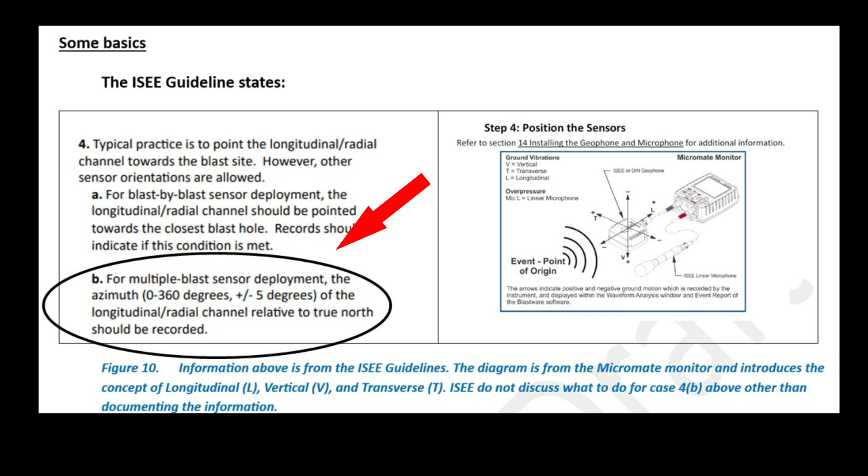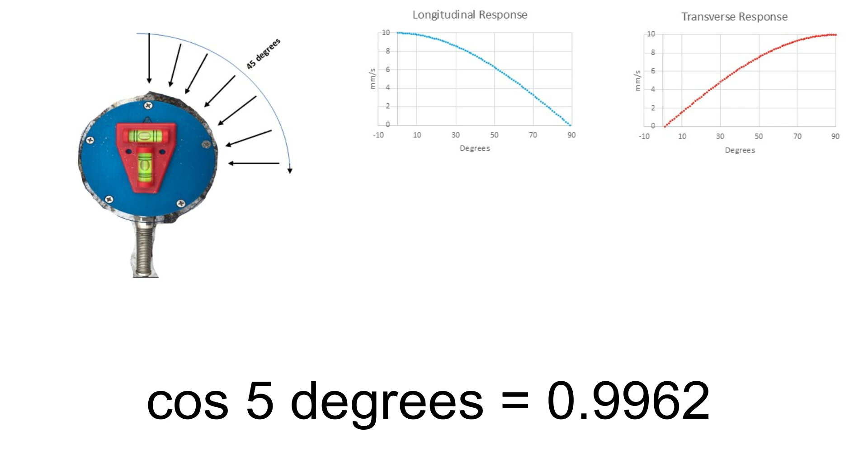So to simulate a sensor not aimed at the energy source, imagine recording individual 10 millimeter per second taps clockwise around the sensor. Now first, no matter where you tap on top of the sensor with a 10 millimeter per second tap, every reading should be 10 millimeters per second. And for geophysical operations, the standard for a recording geophone is plus or minus 10 degrees, which keeps the data within 98%. The ISEE was calling for a 5-degree accuracy, which is 99.6%. But this is just to look at the horizontal components.

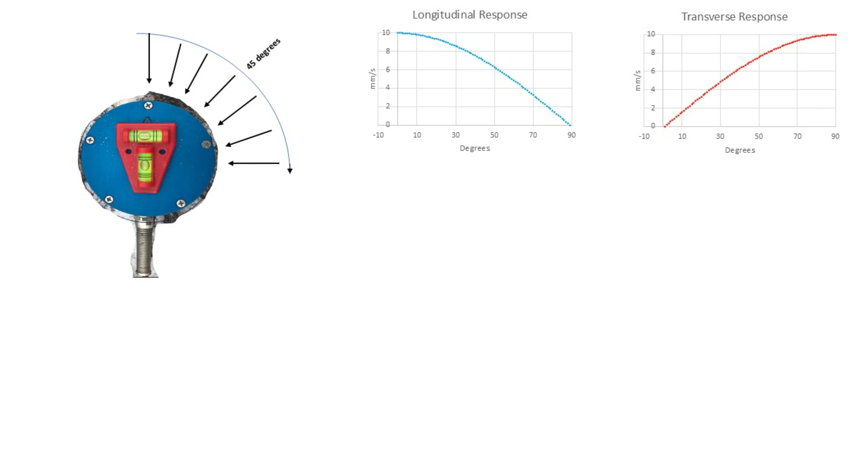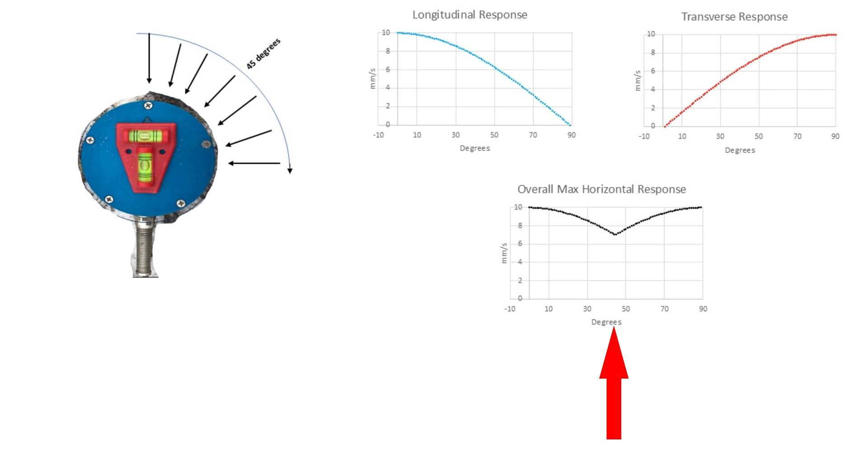So with a perfect tap, the vibration is recorded as component vectors. The blue represents the PPV reading at the longitudinal sensor from 0 to 90 degrees. The red is a transverse sensor PPV recording from 0 to 90 degrees. If we were to look at the max of either sensor, it would look like this third display. That means at 45 degrees offset, each maximum recorded PPV is just 71% of the actual vibration energy. If your sensor is not aimed at the source, this is what you might be relying on during real-time monitoring.

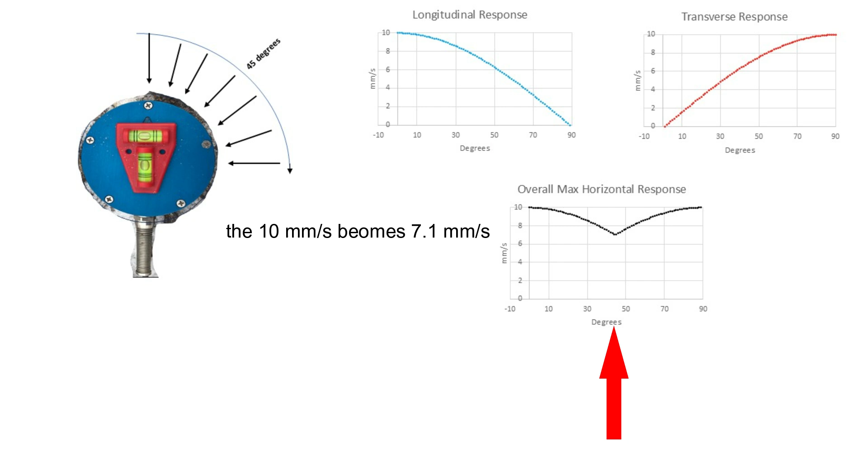So, how do we recover the 10 millimeters per second? You have to use the Euclidean norm from both horizontal sensors, which is the square root of the sum of the squares of the horizontal measurements. This would yield the results shown in green.

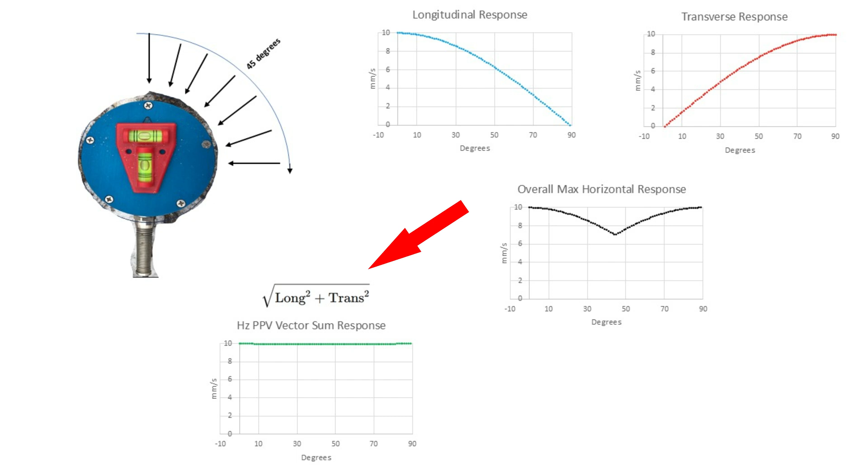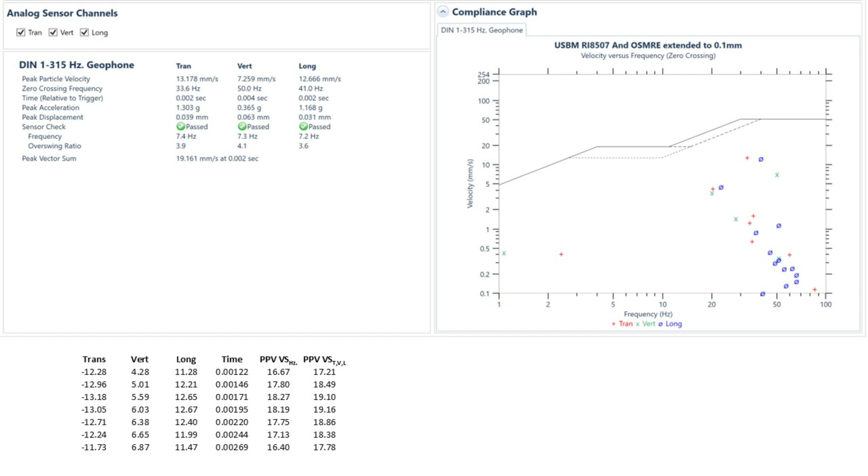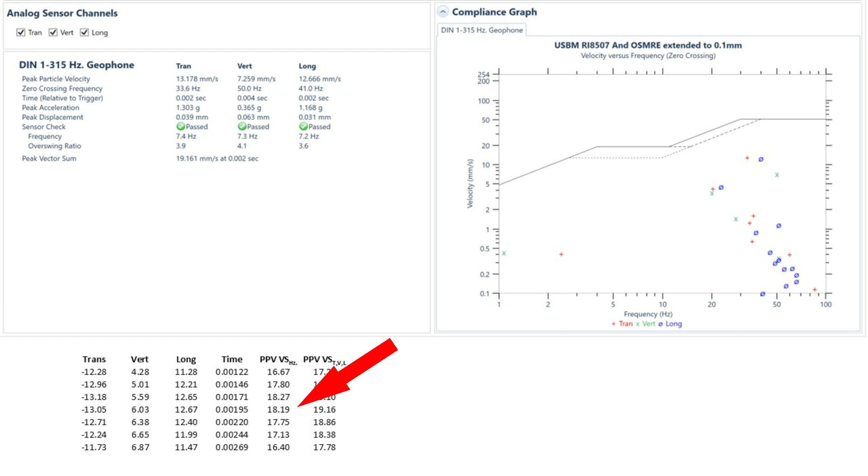Now, this is not a perfect solution and will likely yield slightly higher vibration values, but it is better than misunderstanding the data. The reason the results could be slightly higher is, even with the longitudinal axis pointed at the energy source, there would be vibrations measured on the transverse axis. The key takeaway is, horizontal PPV readings depend on your sensor orientation, and although not discussed, the vertical PPV is independent of the azimuth.

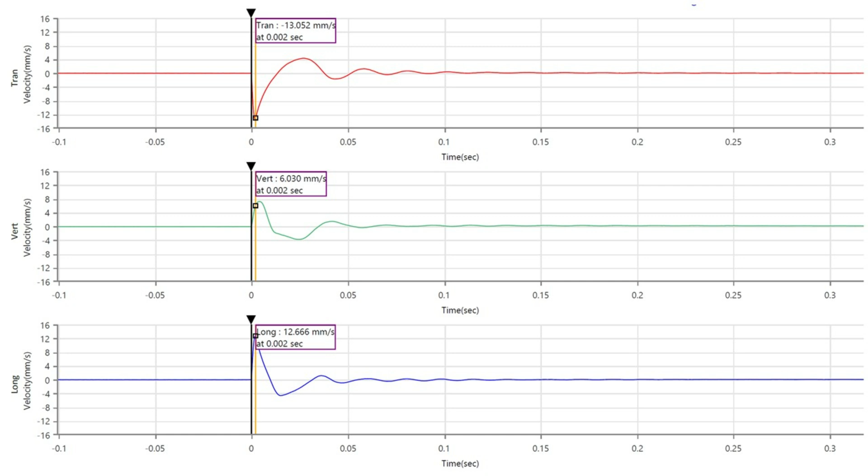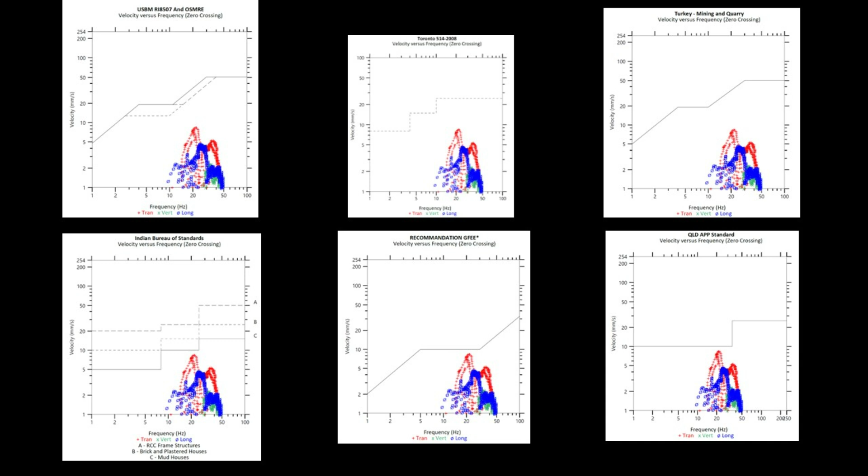So, compliance considerations. This is the same data displayed with different compliance thresholds. The industry standard is red for transverse, green for vertical, and blue for longitudinal, and I've tried to stick with that convention for the most part. The basics here are each component, the transverse, vertical, longitudinal, must stay below the threshold. The PPV vector sum is not required for compliance, but these data are reliant on the sensor being aimed at the energy source.

So why do horizontal vibrations matter? Well, horizontal vibrations are more likely to cause structural damage than similar vertical vibrations. And this is taken from a vibration monitoring expert, and Ken's statements confirm in the first paragraph, horizontal motions are key to damage prevention. Second paragraph, vertical motions affect different structures differently. And in the last paragraph, Ken confirms a best practice would be to use the Euclidean norm, or the square root of the sum of the squares of the horizontal components. Given horizontal motions are more likely to cause damage, and if your sensor is not oriented for accurate readings, you need to understand this and mitigate for it.

And the reality is, often during testing, the sensors are usually aligned and aimed at the energy source at all offset distances. But in production, especially vibroseis, the sensors are often not aligned, which results in lower PPV measurements. The key takeaway, real-time production monitoring must account for sensor orientation, as does any post-processing evaluation.

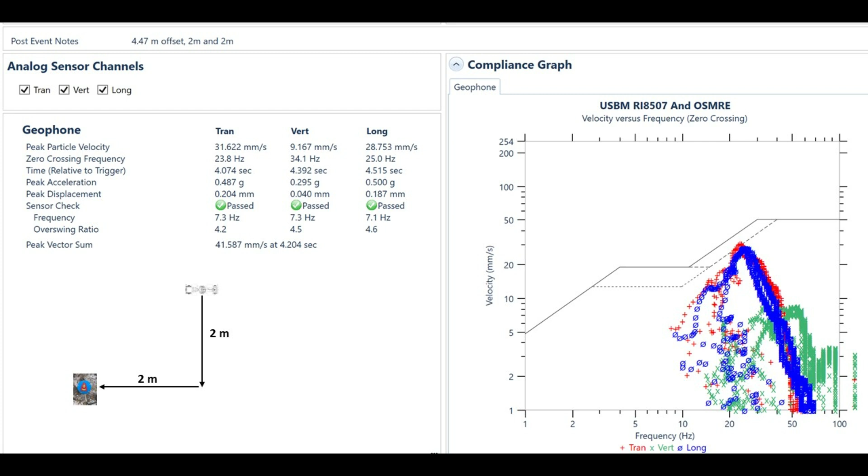You can see it. The transverse in red just exceeds the USBM plaster limit, and the longitudinal in blue is barely within the USBM compliance. And we expect them to be quite similar at the 45 degrees. The vertical in green is well below the compliance, but again, that's independent.

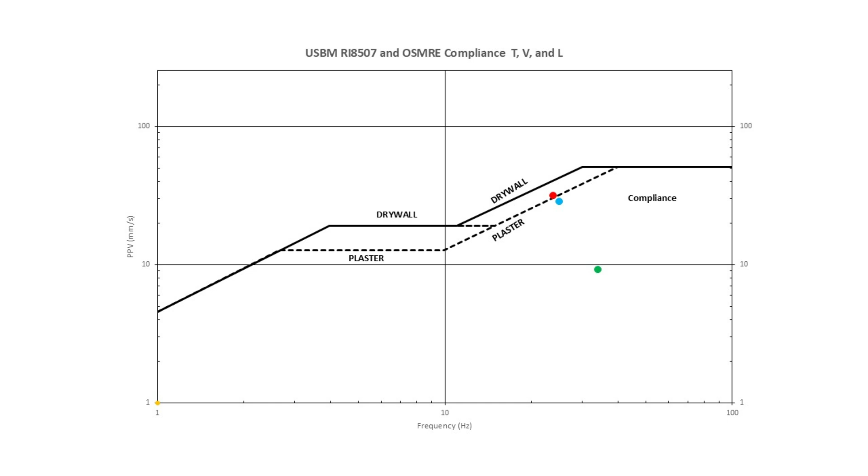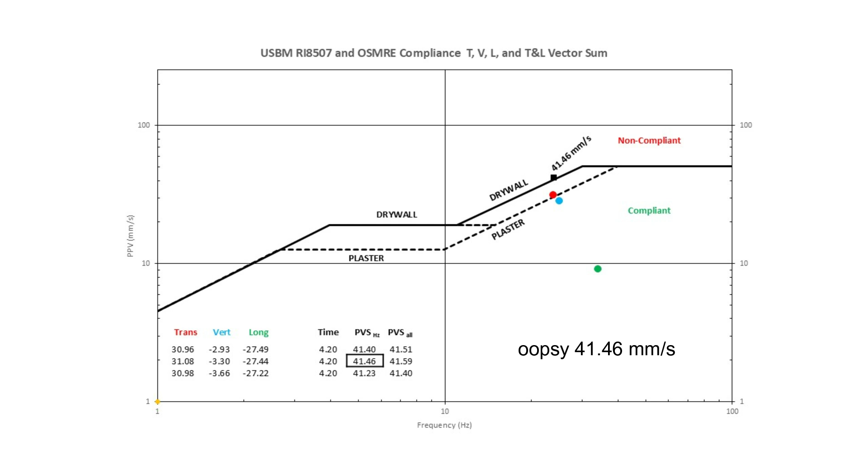So now this is looking at the 3 individual maximums of our example. But we know the sensors are at 45 degree offset and may only be showing 71% of the actual value. So using the Euclidean norm or norm, this is a peak particle velocity vector sum of the horizontal components is 41.46 millimeters per second, which plots as a small black square.

I did this by extracting the 15,000 recorded data points, calculated the Euclidean norm of the 2 horizontal components at every sample interval, and plotted the maximum. In real-time monitoring, the instrument only shows the max PPV of one component, doesn't tell you which one, the frequency, and the PPV vector sum. That means manual data extraction is required for full analysis.

The bottom left-hand corner shows the extract of the data at the maximum Euclidean norm of the horizontal measurements. The data from left to right are the transverse, vertical, longitudinal components, the time, the Euclidean norm of the horizontal components, and lastly, the Euclidean norm of all 3 components.

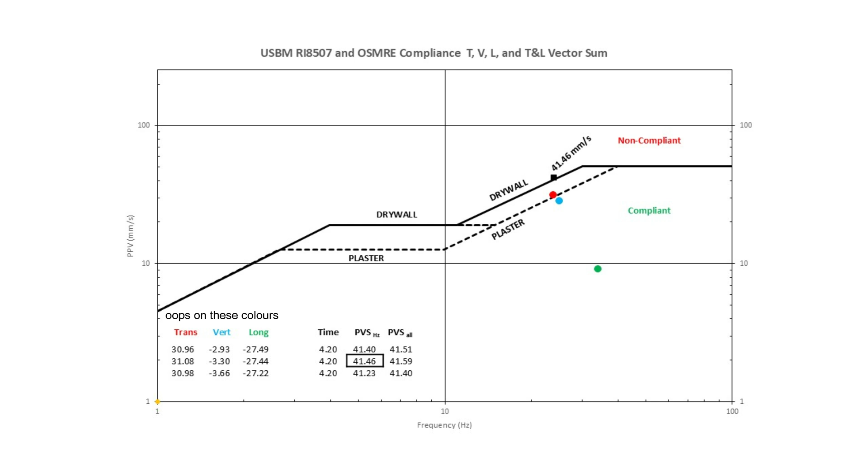If our sensor or a second instrument was aimed at the energy source, we probably would have recorded this 41.46 millimeter per second vibration, which was non-compliant for the drywall threshold and significantly higher than what we originally recorded.

When I first recognized this issue, I deferred to using the PPV vector sum of all 3 components, which is on the safer side. But it might be more accurate and more useful to be using the Euclidean norm of the horizontal components and the vertical component separately when working.

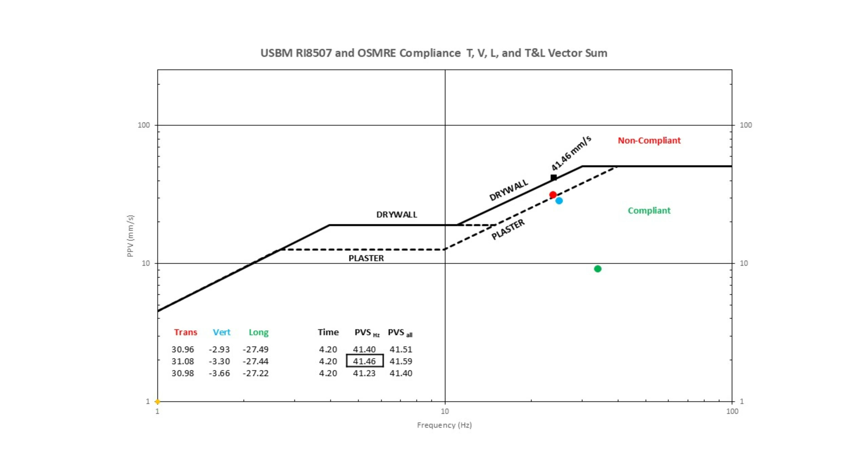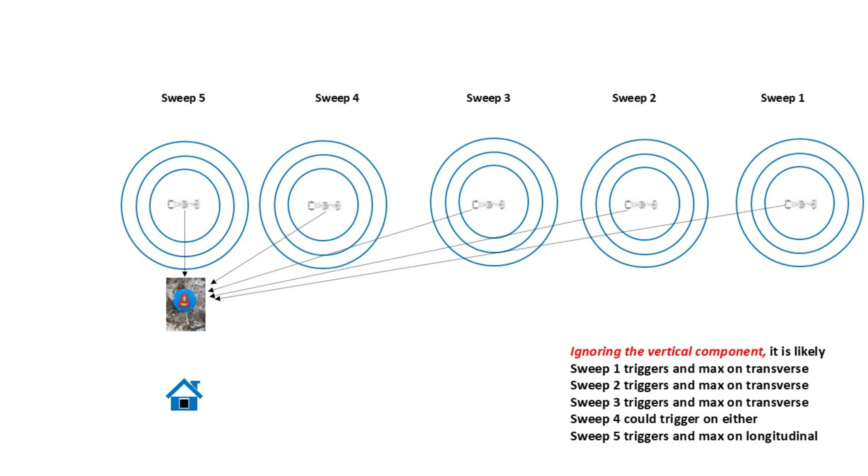Now, this slide ties to the Part 4 video about adequate testing and ensuring you analyze and understand the data to help you with real-time monitoring. In the Part 4 video, I mentioned I have seen many projects defer to 12 millimeters per second as a maximum. That way you virtually don't have to worry about the frequency.

If you defer to this method, you could safely just look at the max result, and if you were not pointed at the energy source, just use 9 millimeters per second as your max allowable, which is 71% of 12 millimeters per second. Now, this has negative implications for the subsurface data coverage, but it might be an easy out.

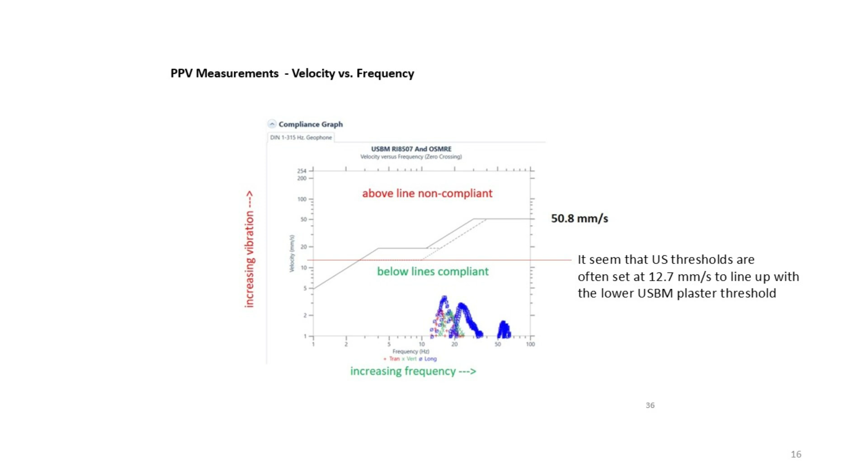So by this point, you should have plenty to think about. Or, on the other hand, you might just be nodding, wondering if there's anything I might say that you don't know. Okay, so slide 17.

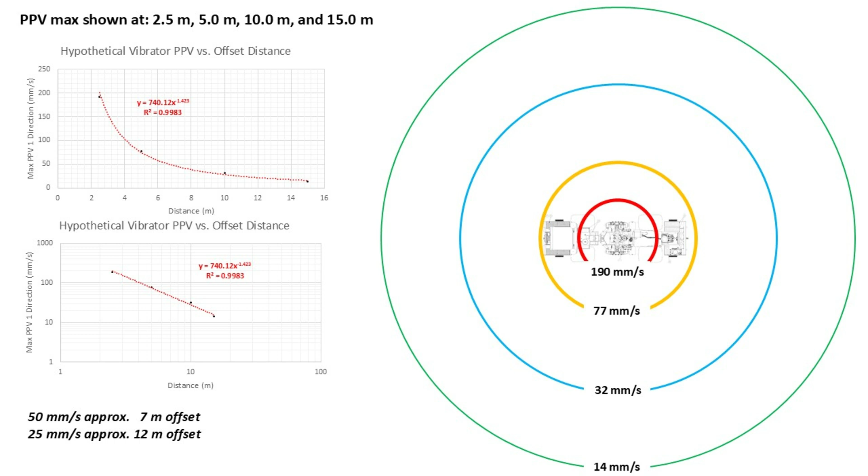Consider these test data from a larger vibrator. On the left, we have the energy decay curves shown with both linear and logarithmic graphs. And on the right side, I've created a PPV decay curve 360 degrees around the vibrator. These are peak particle velocity vector sum data and assume a homogeneous response around the vibrator. In rough surface terrain or other situations like a ditch, there will be variations.

Now, let's look at the individual components of a small vibrator as it approaches. This is from a smaller vibrator approaching the sensor. The sensor is at 2.8 meters cross-line from the vibrator as it approaches. The sensor orientation does not change. 3 of the graphs are all the individual sensor component responses, and the bottom right graph are all 3 components plotted together with the PPV vector sum. The vibrator is approaching from right, which is farther and becomes nearer on the left of the graph.

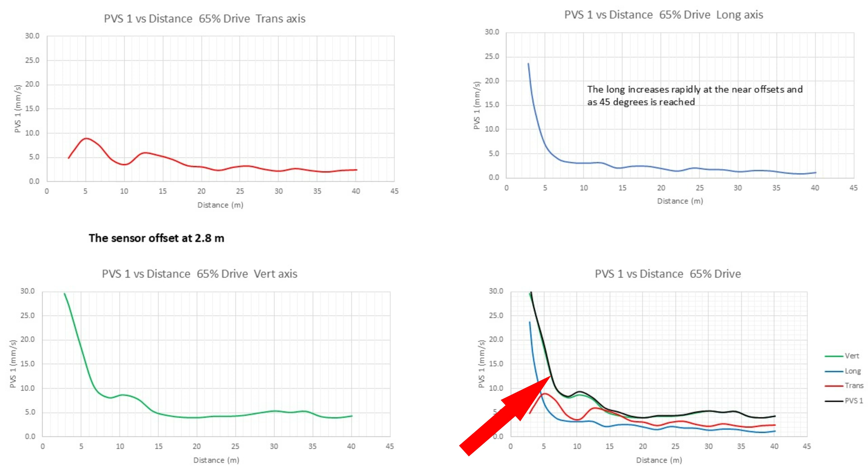If you look at the bottom right graph, the transverse vibration level in red has a higher reading than the longitudinal sensor results in blue at the far offsets. That's expected until the vibrator reaches about 45 degrees to the sensor. Once it becomes closer than the 45 degrees, the blue longitudinal vibration increases rapidly. And that's because it's coming right in front of the sensor. In this example, at the cross-line offset, the vertical sensor virtually controls the PPV vector sum.

This slide is exactly the same sweeps, but a second sensor was positioned 9 meters back from the line. Again, as expected at the far offsets, the transverse recordings are higher than the longitudinal. At about the 12-meter offset, the longitudinal sensor starts increasing rapidly. From 15 meters to the nearer offsets, the longitudinal axis controls the PPV vector sum and not the vertical, and this is expected from surface sources. I've also seen data for the same sweeps with a sensor at a greater offset. I think it was back 18 meters, and it also yields the same predictable results.

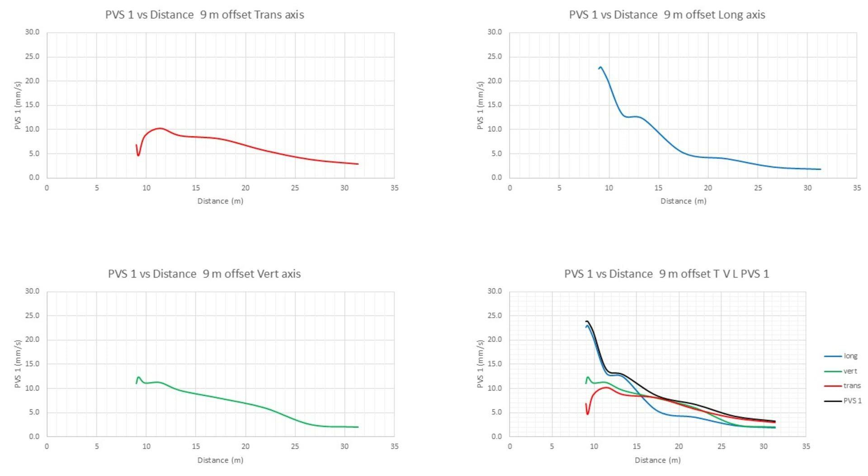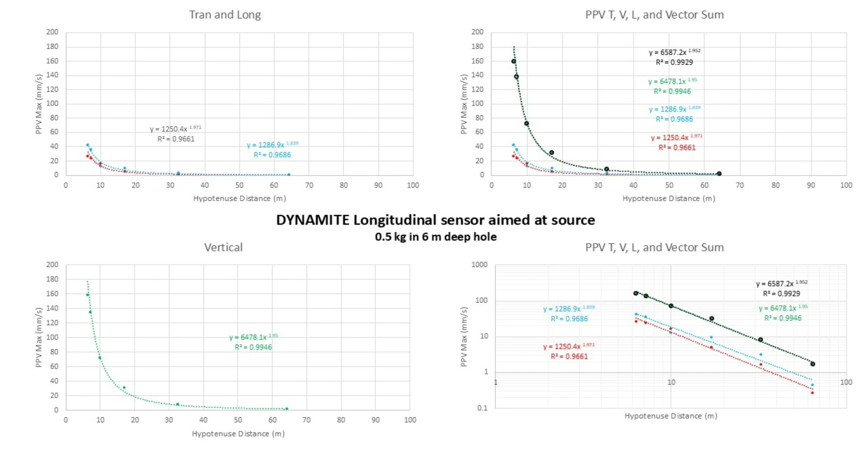To look at a dynamite case, here's a quick look with the longitudinal axis aimed at the energy sources. This is a 0.5 kg dynamite charge in a 6-meter deep hole. The vertical component dominates the PPV vector sum / Euclidean norm, and as expected, the longitudinal axis aimed at the source is larger at all offsets than the transverse axis. The bottom right graph is a log plot of the 3 sensors and the PPV vector sum. It is clear the vertical component dominates, and the 2 horizontal axes increase as the source approaches. When the sensor is aligned like this, there is no need to use a Euclidean norm on the data set because you can see the 3 individual components.

So the key takeaways: PPV readings depend on orientation and offset angle, and false compliance risk increases with, let's call it, sensor misalignment. So here are some thoughts. Conduct detailed testing and review and analyze the results. Recognize the transverse and longitudinal components are impacted by sensor orientation, and for dynamite blasts, the vertical component often dominates, except in shallow holes. So for real-time monitoring, sensor placement near the structure is best, but not always possible. Reorienting the sensor during production is often impractical, so you have to account for orientation error instead.

If the sensor is some distance from the structure, you need to decide on whether you want compliance at the sensor or at the structure. If you accept non-compliance at the sensor, your risk assessment and data must fully support extrapolated values at the greater offset to the structure. And as you're working, predict the next sweep vibration levels and adjust your drive level before exceeding limits.

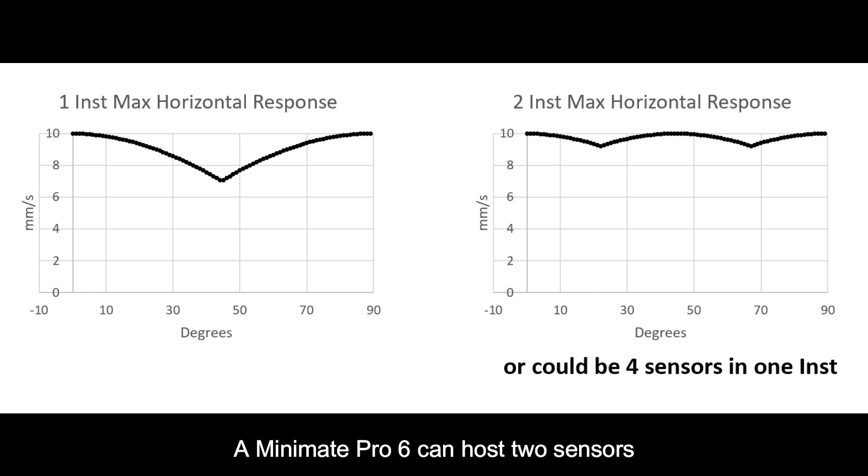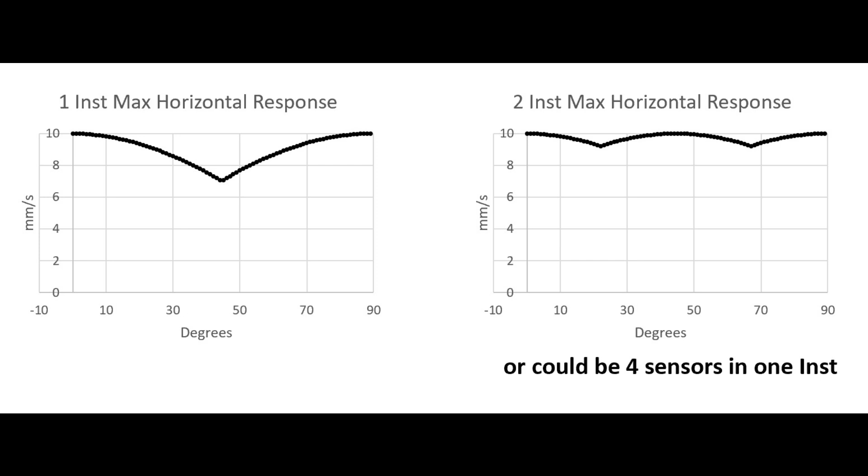And here are some things to consider, but they also have complexities. So what could work out nicely? A couple of things. Perhaps practical, perhaps not. Manually align the sensor each time. 2 co-located sensors at the location, the second instrument at 45 degrees to the first. Third, an instrument with a 4th sensor in it at 45 degrees to the other horizontal sensors could help mitigate this. A mounting bracket secured to the earth that would allow the sensor to be easily swiveled but still maintain good coupling.

Set the sensor in front of the structure at a 45-degree offset and do not vibrate within the window in front of the structure. Maybe get manufacturers to update the display to include the Euclidean norm of the horizontal components to help you with the real-time monitoring. Or simply use a cutoff of 71% of the threshold.

So, final takeaway, understand sensor alignment is critical for accurate PPV monitoring. Misalignment can result in false compliance readings, masking the risk. Testing and continuous data analysis will help you refine your best practices.

It's that simple. Anyway, the next video is going to look at some vibrator considerations and probably address a couple questions like these two.